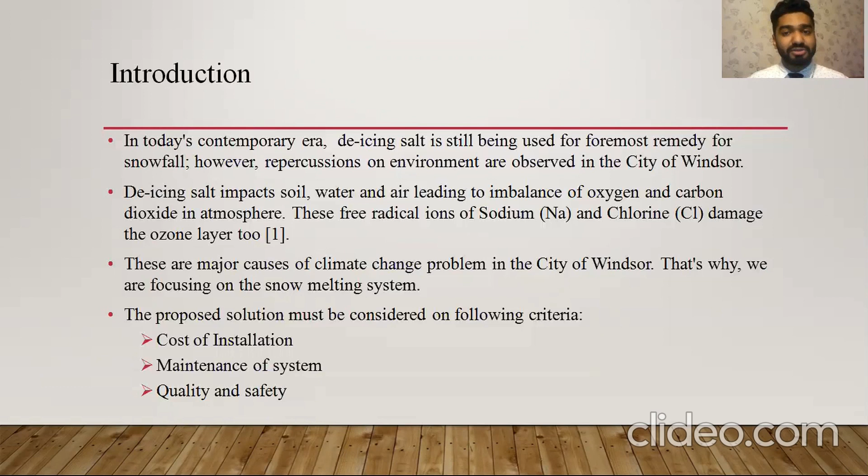That's why our team has come up with the solution, which is the snow melting system. There are several criteria which should not be overlooked, and out of those, the major three are cost of installation, maintenance of the system, and quality and safety.

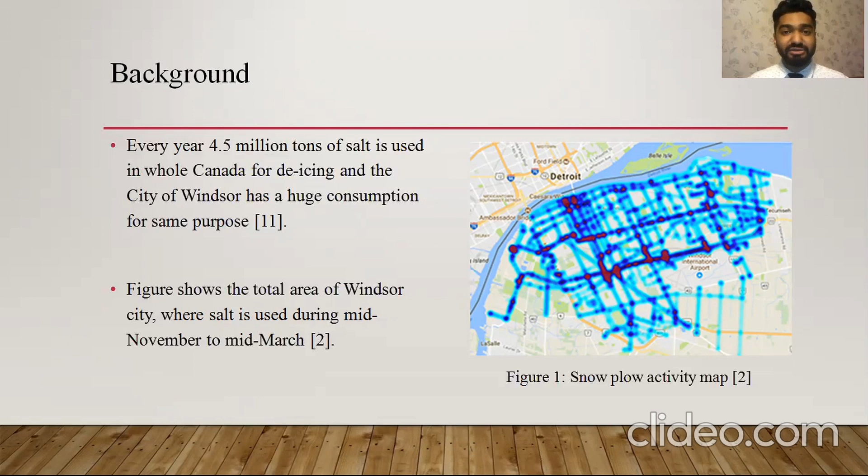The whole of Canada uses de-icing salt as a first remedy, but do we know the consumption? It's 4.5 million tons per annum, and the city of Windsor has a huge part of that consumption. Figure one shows that the city of Windsor has almost 70,000 lanes, consisting of 1067 kilometers.

The municipality of Windsor provides 21 snow removing vehicles, and the cost for that is almost $12,000 per hour. The total work is almost 3 to 6 hours, for which the budget has been handed over as $350,000 per single snowfall.

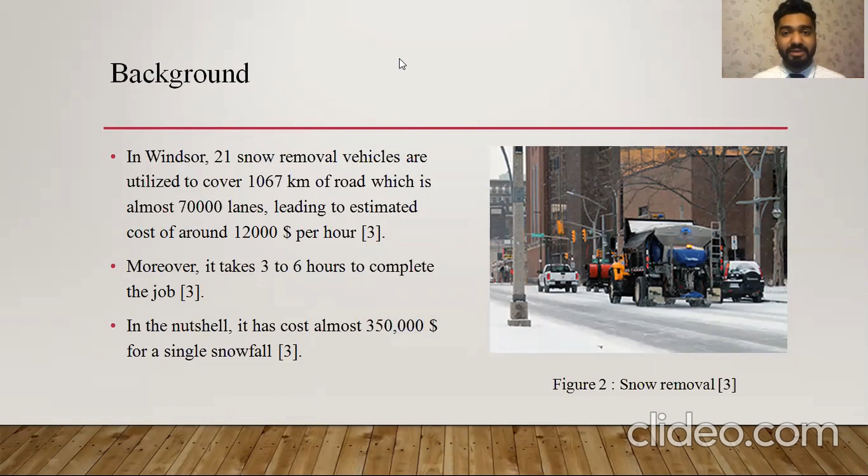Now I'm explaining the problem description. Using salt for de-icing creates a negative impact on the environment by polluting the air, water, and soil. First of all, we need to know more about salt. What is salt? One part is Na and another part is Cl.

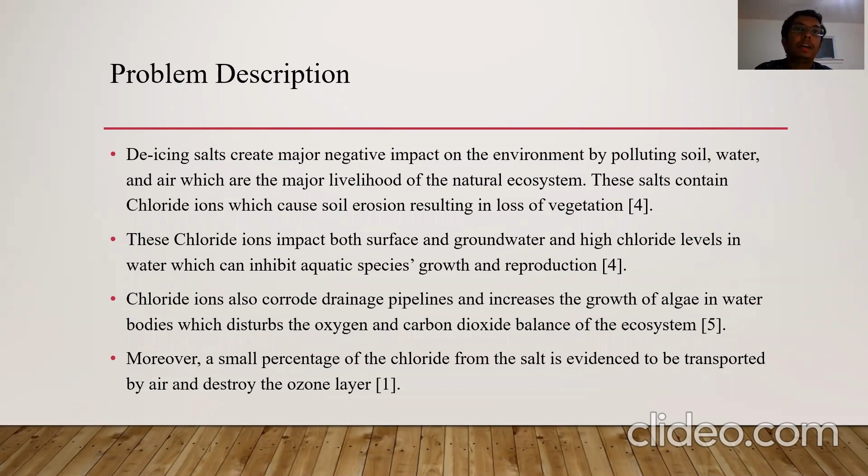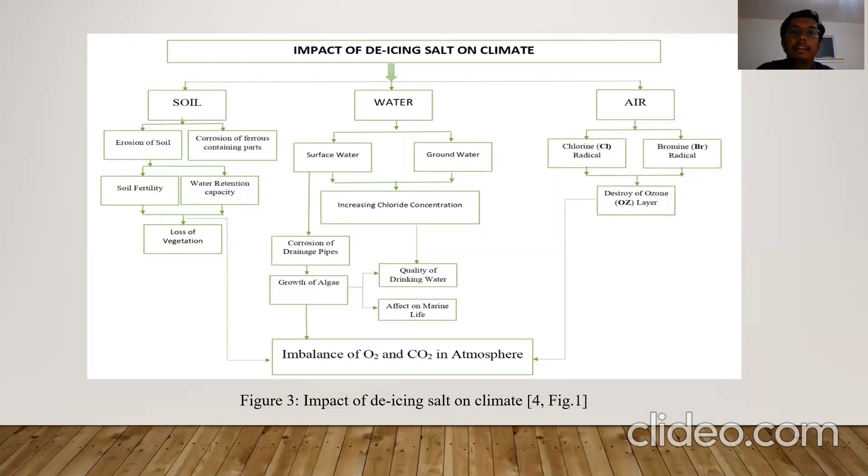Secondly, the de-icing salt, when in contact with water bodies like rivers and lakes, creates an imbalance of oxygen O2 and carbon dioxide CO2 in the climate. Lastly, its impact on the environment by air: when it contacts air, it discharges chlorine and bromine. This compound damages the ozone layer, which acts as a major cause for climate change.

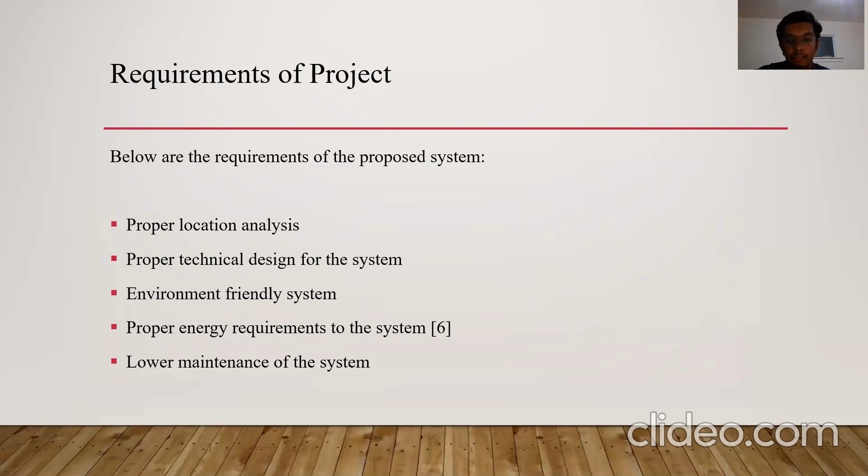So there are several requirements for this project: need for proper location and technical design. The system should be environment friendly and low maintenance. These are the criteria for the success of the project.

A certain amount is required for constantly melting snow, and we need fixed voltage and frequency, like 120 volts and 60 hertz in Canada, along with proper surface protection to protect our system. Now I invite Nitesh for the further slides. Thank you.

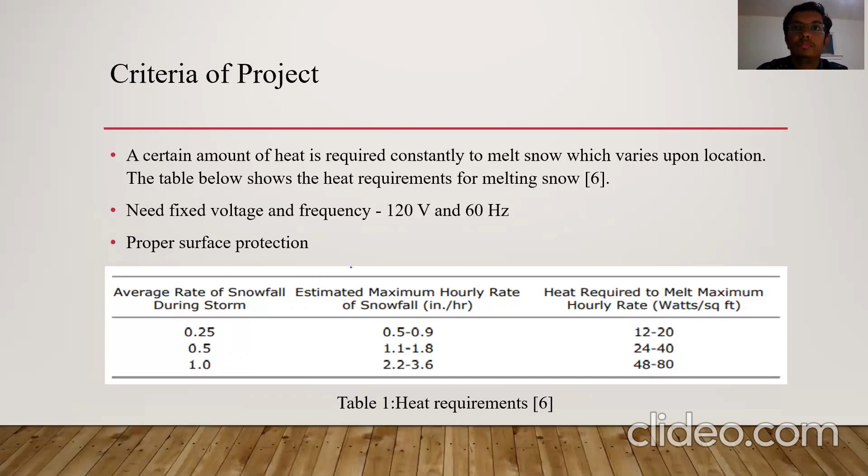Snow sensor: it is responsible for monitoring changes in the level of accumulated snow along driveways and walkways, which then sends an input signal to the control panel.

The control panel, based on a predefined algorithm, sends out an output signal to the relay panel. The relay panel is responsible for switching on the system by delivering the required amount of electrical energy to the snow melting mats or cables.

These snow melting mats or cables, laid below the driveways or walkways, are responsible for converting electrical energy to heat energy, which accomplishes the task of clearing the accumulated snow, thus eliminating the usage of de-icing salts.

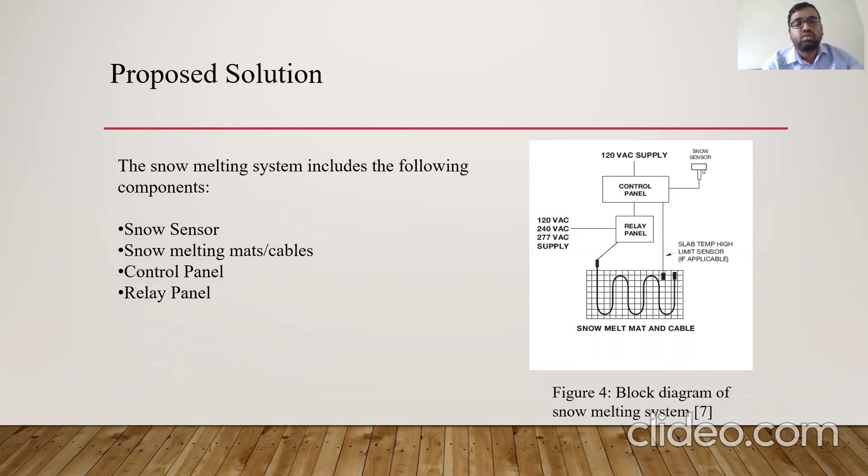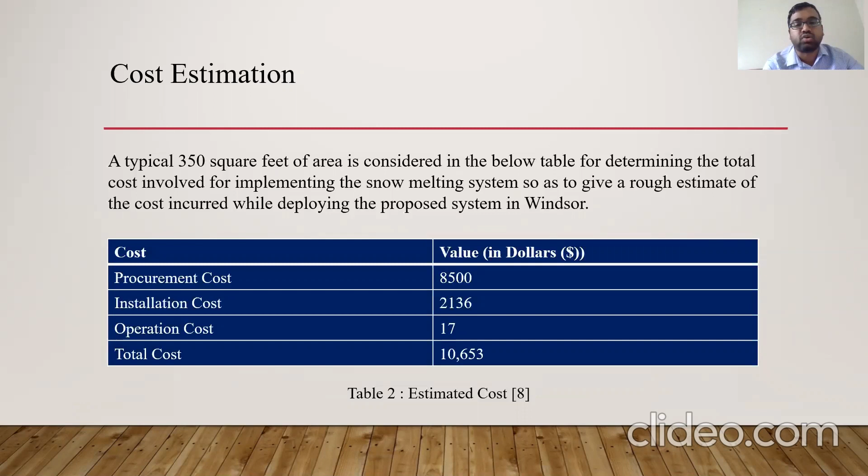Moving on to cost estimation, 350 square feet of area is considered for estimating the total cost. The table below shows the breakdown of various types of cost, including manufacturer's cost of components, labor cost, and operation cost, which sums up to around $10,653. Hence, the cost incurred per square feet is around $30.

The total land area of Windsor is around 146.91 square kilometers. Applying the relevant conversion metrics, we obtain the square feet value of the total area of Windsor, which is then multiplied by the cost per square feet to obtain the total value of the proposed system, which is around $49 billion.

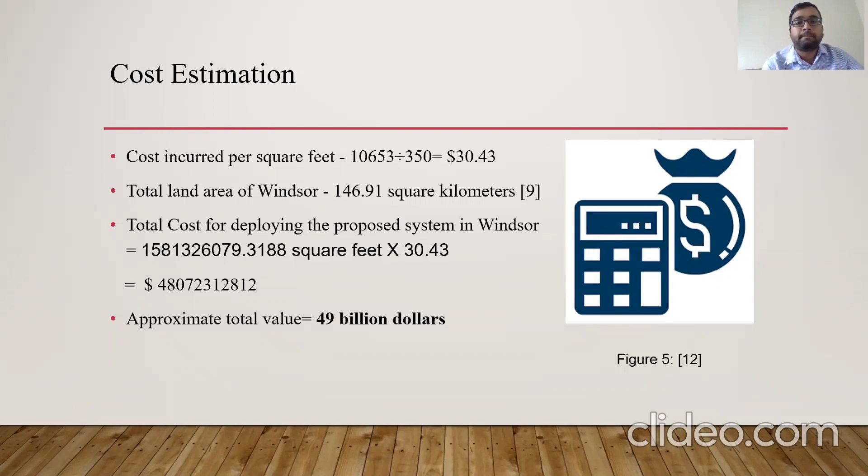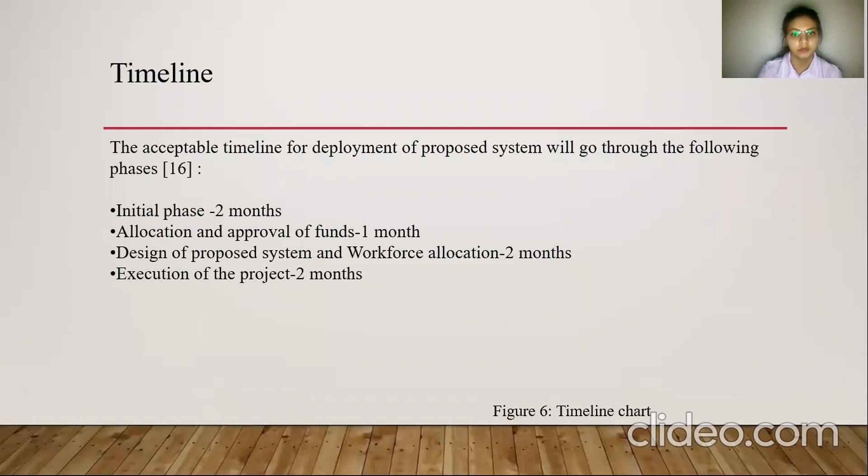Once our project has been approved by the Windsor City Council, the project is subdivided into 4 stages. In the initial stage, our main agenda is to allocate suitable land for installing the snow melting system. The second stage covers collecting all necessary funds for installing and operating the system, which could happen only after approval of the estimated budget from the City Council's financial department.

The third stage includes designing the heating system as per requirement, including selecting the desired heating element and sufficient manpower. The last and most important phase is executing the project, where proper precaution has to be taken while installing the system. Testing has to be done very accurately in this phase, and electrical efficiency of the entire system should be monitored for safe working.

The overall time for this project to be successfully completed, if everything goes as planned, is no less than 7 months. Here is our project's timeline.

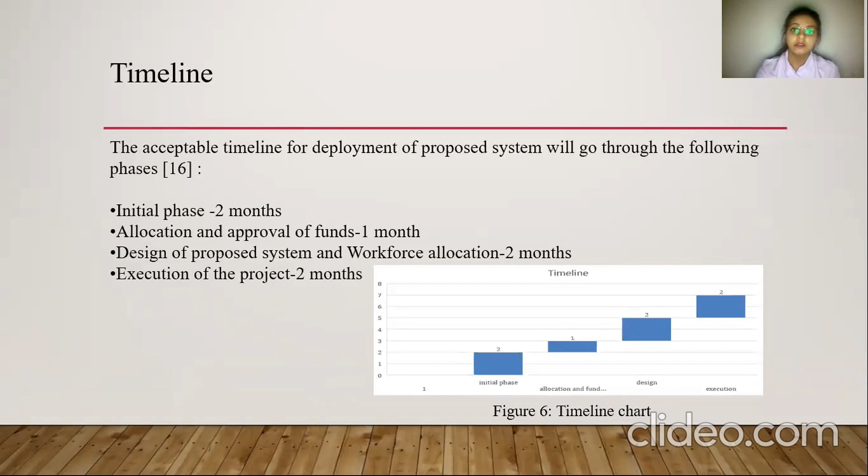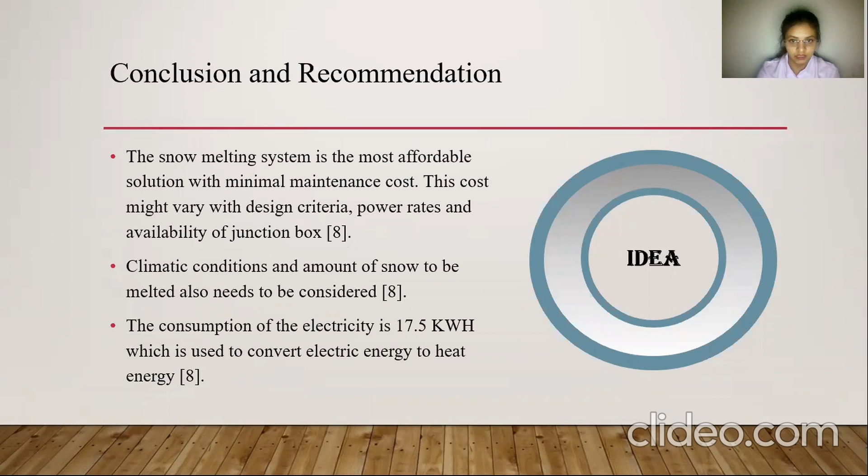This is the most economical solution to overcome de-icing salt and its negative impacts on the environment. The cost may vary based on the size of the required system, which directly depends on climate conditions and the amount of snow to be melted. As per our system, the electrical power required is 17.5 kilowatt-hours.

This system works by converting electrical energy to heat energy. As per our research and proposed system, implementing this system in the city of Windsor would be the best eco-friendly solution to overcome problems caused by de-icing salt.

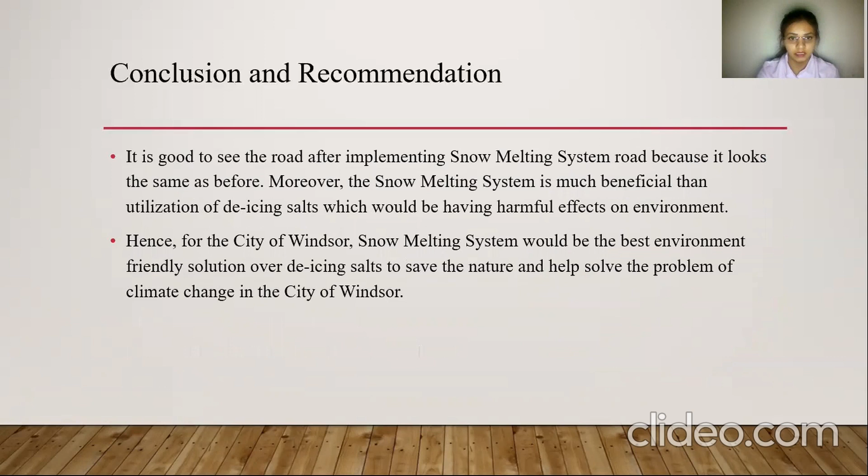After thorough research and going through the mentioned references, we came up with an affordable solution and were able to successfully complete it without facing much problems. Thank you so much.